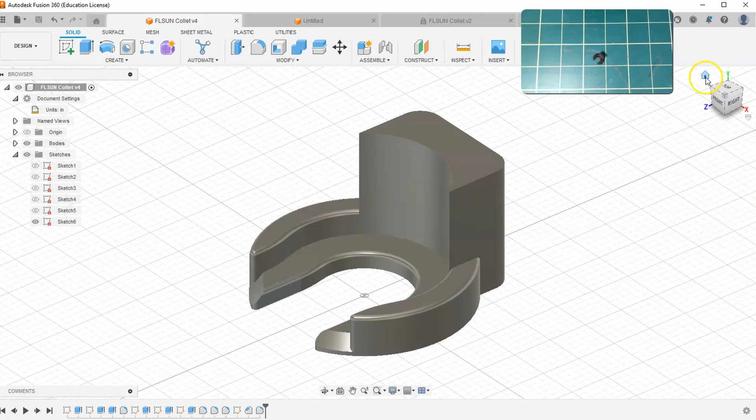In this video, I'm going to show you how to 3D model and prototype a 3D printable collet clip, just like this one right here.

I broke something on my FLSUN Super Racer, and when I was changing the parts, I lost one of the two small clips that go on either end of the Bowden tube. When I couldn't find any spares laying around, I decided to just 3D print one. But instead of finding one online, I thought it would be fun to make it myself and prototype it, showing you my process as I go.

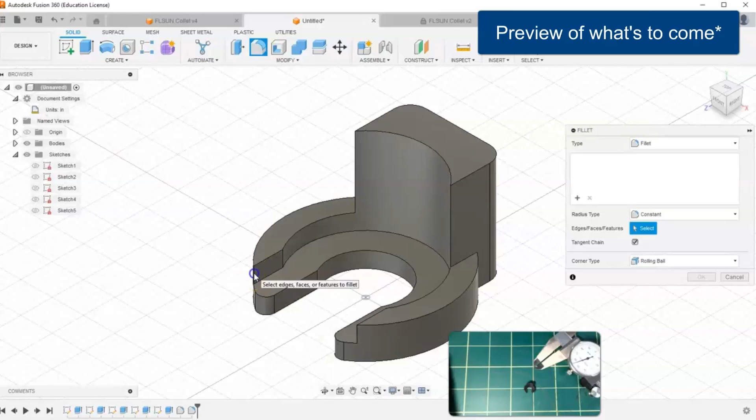I will be using Autodesk Fusion to 3D model and Ultimaker Cura to slice my prints, but you can easily use similar software to do the same thing. If you've ever been curious about 3D modeling your own 3D prints, this series is meant to show you my whole design process from beginning to end.

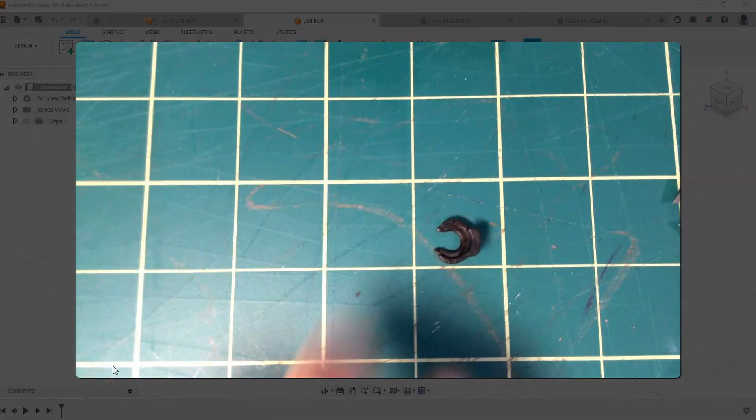So let's give this a try. The first thing we need to do is figure out the size of our collet. I'm going to wrap a dial caliper around the diameter, and it looks like it's almost half an inch exactly. So we can go ahead and start with that.

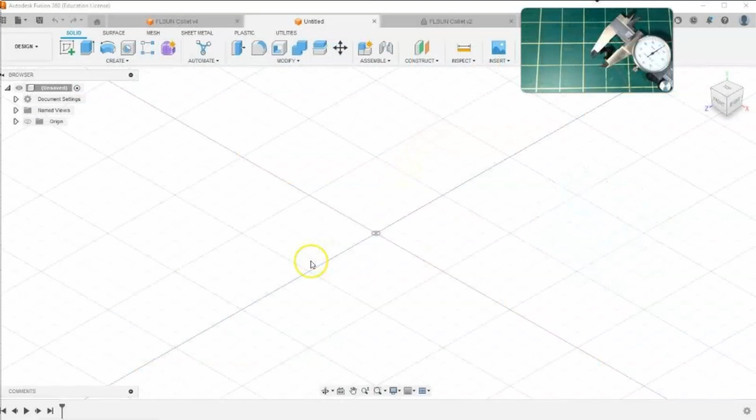I'm going to start a sketch on this bottom plane, grab my circle tool, and sketch it out. It looks like we're in millimeters, so let me change that in my document settings to inches. Hit OK and try this again, and we'll type in 0.5.

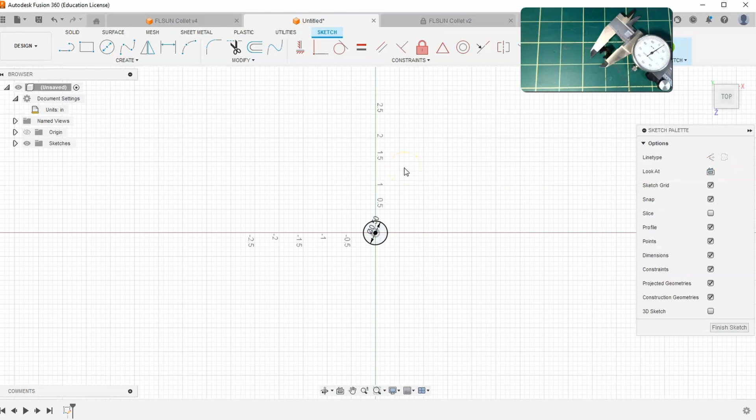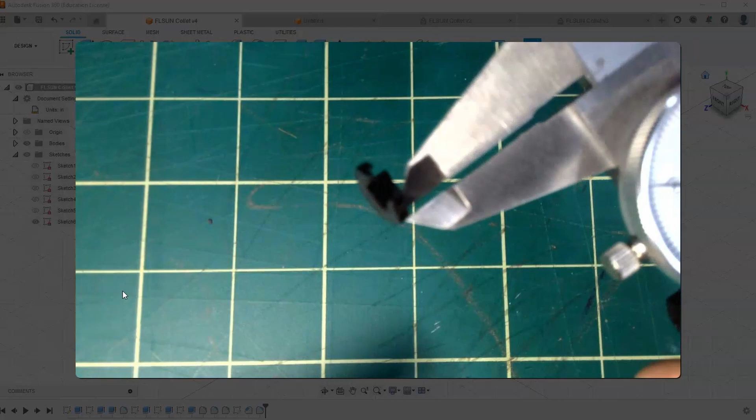How wide is this outer circle over here? If we wrap the caliper around the edge, you'll notice I'm not getting the entire thing - I just want that top piece. And it looks like it's about 0.06 inches.

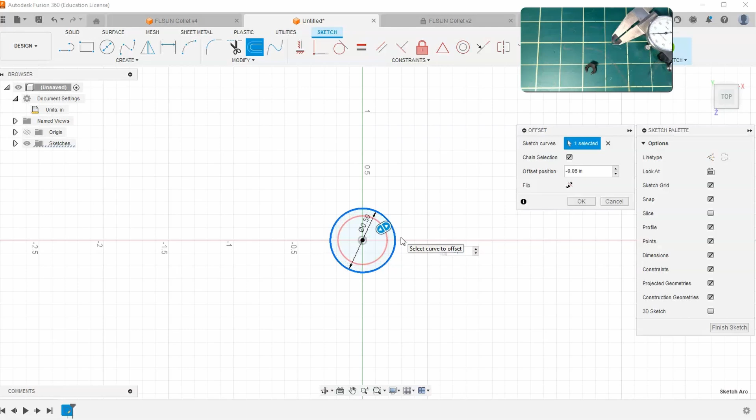Let's go back into Fusion and find my offset tool. Let's zoom in - we want to bring it inside 0.06, making sure we're going inside, so a negative 0.06. Hit enter. Then how tall is this thing? It looks like it's almost exactly 0.1 inches, so let's round up to 0.1.

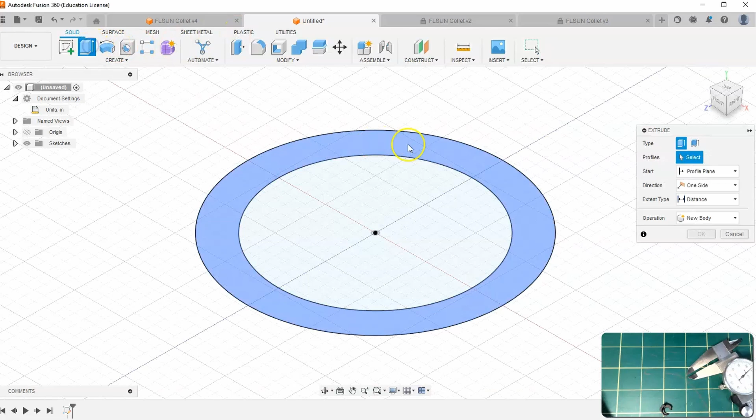So we'll finish our sketch, go to my home view, hit extrude, go up 0.1, and hit OK.

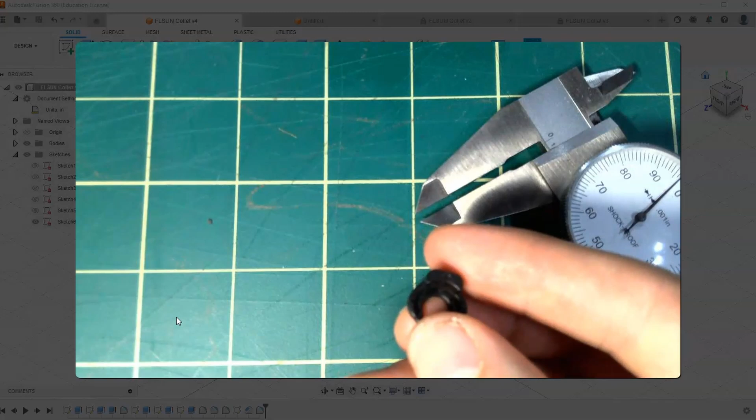So what else is going on with this thing? If you look here, you'll notice that this outer circle I just drew is actually the same as this circle of this bigger piece. This view is perfect to see it - you can see the circles are the exact same diameter, the exact same radius. So that's going to be pretty easy.

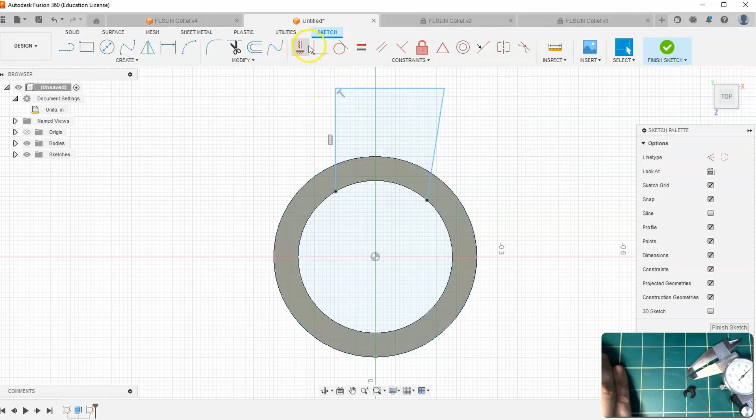Let's start a sketch on this top face. I want to grab my line tool and lock it onto this inner edge, draw it back, click out, then draw another one making sure I connect it to this edge. Right click, hit OK, and find my horizontal and vertical constraint - I'm going to tell this line to always be horizontal. Right click, cancel, and grab my construction line tool.

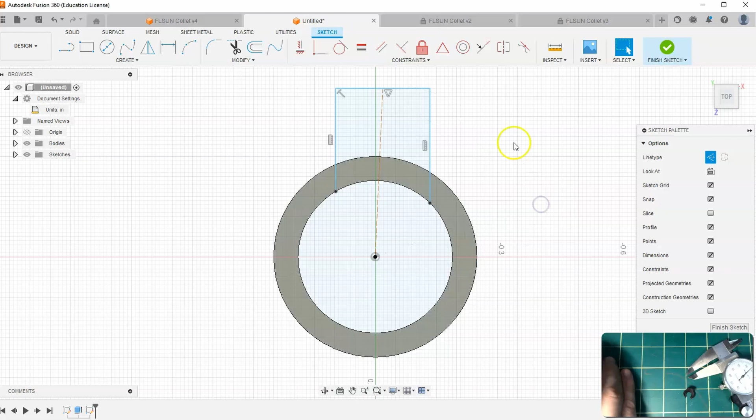I'm going to find the center of this. Once it magnetizes, I'll click and drag it down to my origin. Right click, hit OK, and tell this line to be vertical as well by going to my horizontal vertical constraint and clicking on this line. What does that do? It tells this to be centered, so no matter how wide I make this, it is always centered.

So the question is, how wide do I want to make it? We grab our dial caliper and wrap it around this edge. What do we get? About 0.3, a little bit wider than 0.3. We can round down that measurement to 0.3, so I'm going to give this a dimension of 0.3.

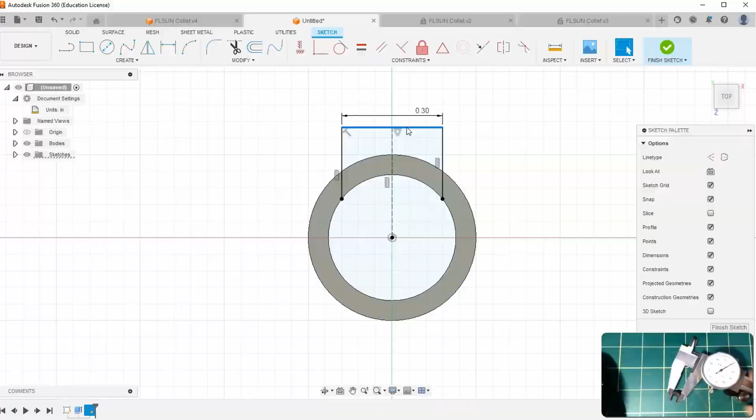The last thing we have to ask is how far back does this go? That's a little bit harder to figure out, but we can guesstimate it. I'm going to wrap it around this center edge. What do we get? Almost exactly 0.1. It's probably not exactly 0.1, but close enough that it's not going to matter.

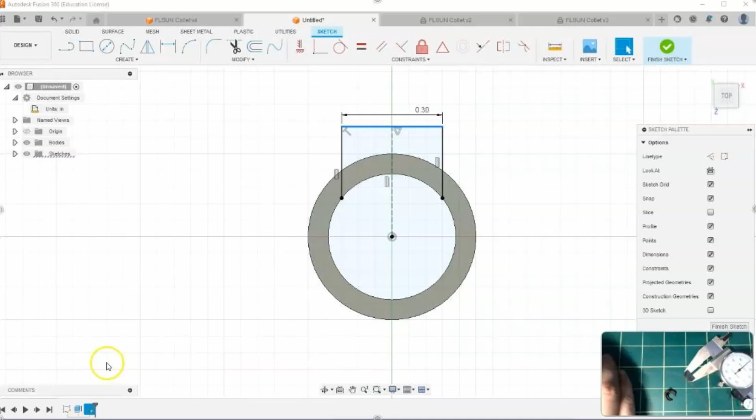Let's go back to a small screen and go to dimension. I want a dimension from this - actually, I'm going to right click and cancel. I'm going to grab my point tool.

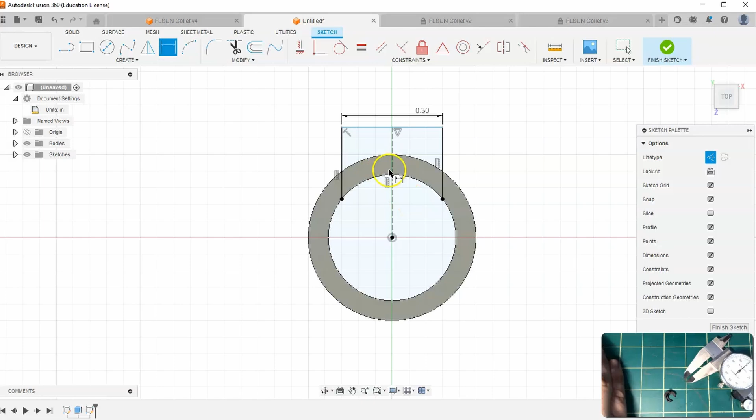I'm going to put a point down at the intersection of my construction line and this inner edge here, and measure from this dot. So dimension from this dot to this line—what is that dimension going to be? 0.1. Now, if we look at this, it's clearly filleted here on the back walls, but I'm actually going to add the fillets after I extrude it.

Let's look at this again. It clearly extrudes down and up. So how do we go down and up? We're going to finish our sketch, go to our home view. I want to extrude this down, and I want it to go all the way to the bottom, so I'm going to go to Object and click on the bottom so that it extrudes all the way down.

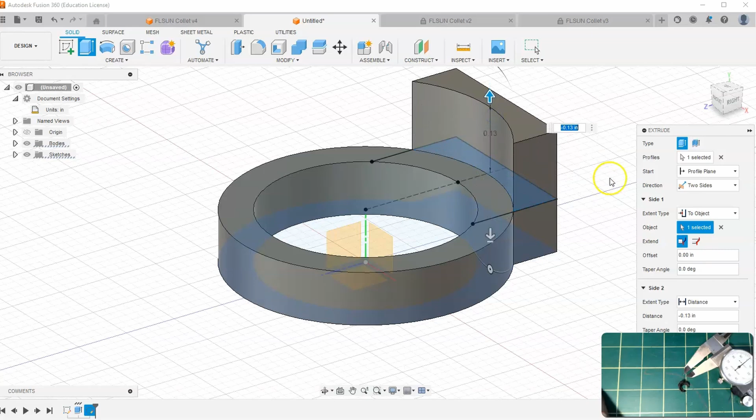I also want it to go up, so I'm going to change this from one side to two sides. Where's the other direction going to go? It's going to go this way, and I don't want to forget this profile, so I'm going to go ahead and select that as well. And I want to make sure that this is a join, so I'm going to move this out of the way and go to join.

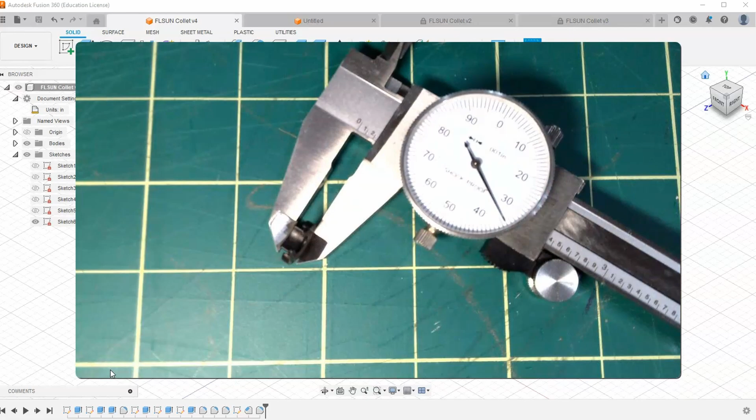Then the question is how high do I want to go here? How tall is this thing? It looks like it goes up a little bit more than 0.225—looks like it's 0.235. I'm going to round that down to 0.225. So let's go back here—we want this to go up. We'll say this is the negative direction in this case, so negative 0.225.

And so now it's starting to look a little bit like this shape here. Let's remove our dial caliper and take a look at it. So what do we need now? We need that inside smaller circle. So let's go ahead and figure out the diameter of this.

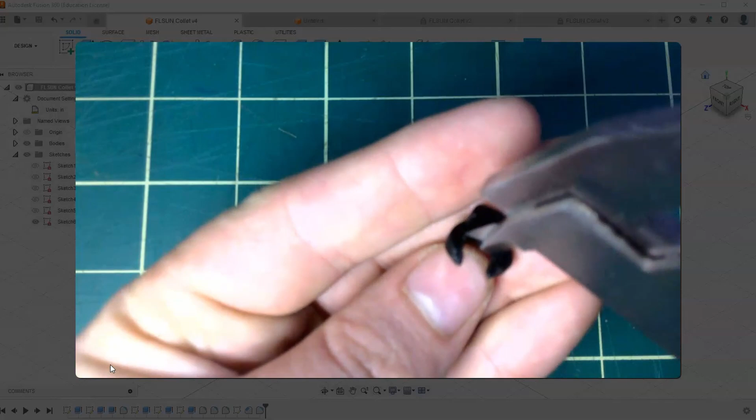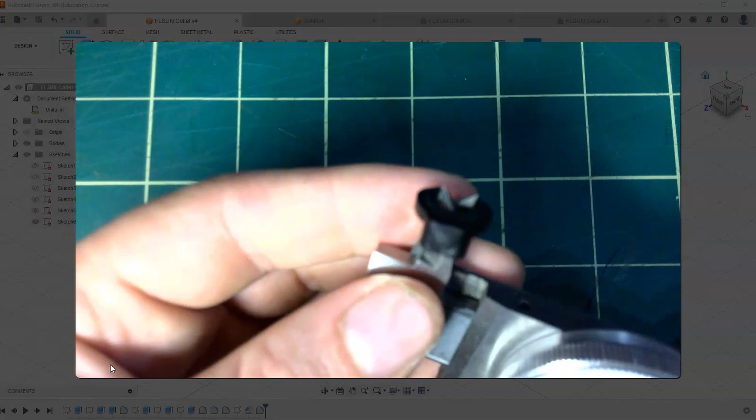So we stick the top of our dial caliper inside, and we pull it apart until we get the diameter. You can see how far apart, if we look at it from the top view, the ends of this inner circle are by using the same measuring of this dial caliper. And what is it? It looks like it is 0.225. And so we go back to our small view again.

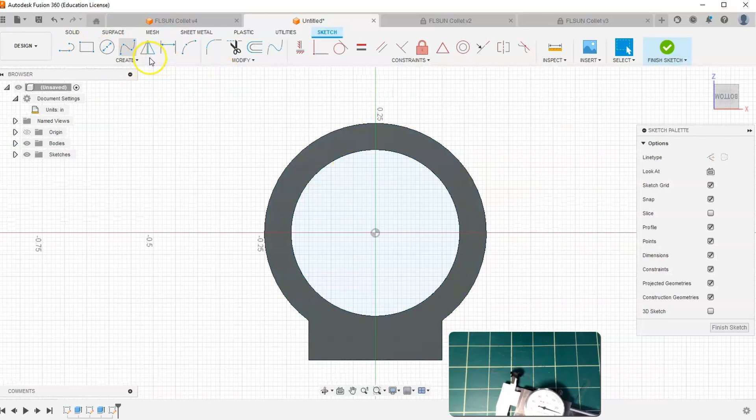I am going to start a sketch—this time I'm going to go from the bottom, because this is extruding from the bottom if you look at it. So I'm going to draw a circle and tell it to be 0.225. I'm going to finish my sketch, and extrude this shape upwards.

The question becomes, how far up do I want to go? So we grab our dial caliper and take a look—how tall is this inner circle here? It looks like it is about 0.05. And so this is in the negative direction in this case, so negative 0.05.

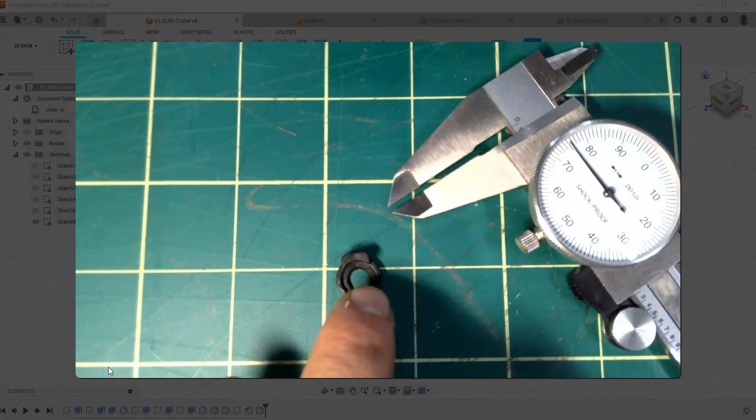While we're looking at this, you'll notice that the inner circle on the bottom comes a little bit closer together than the top outer circle, but both get cut off before they complete as a circle. You'll notice this one finishes as a circle, but this one sort of finishes as a circle, then almost a straight line there. So let's go ahead and mess with this smaller inner circle first.

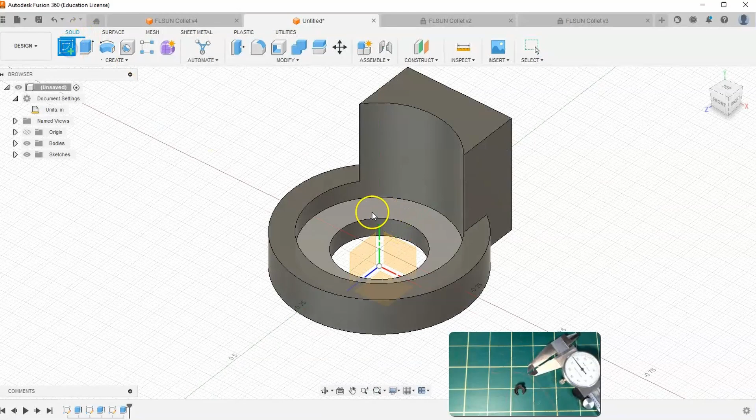So how am I going to do that? I'm going to start a new sketch on this face, and once again grab my line tool, and connect it to this inner edge here and drag it down. I'm going to move my screen over a little bit. Click, click, click. And just like before, I want to make sure all my lines are horizontal or vertical—so now we can see that this is perpendicular.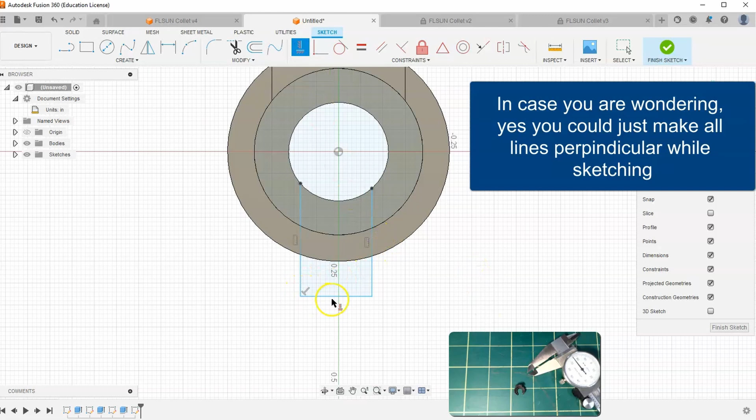I can check—it says sketch geometry is over constrained. All that means is that it already has that constraint. Cancel. I want to turn on construction, click on my line tool, and just like before, select my origin and the center of this line down here, and click. When it magnetizes, right click OK.

I just want to make sure that this line is vertical. Once I have it vertical, you can see that it's always going to be centered because this line is vertical and stuck to the center. Then the question is, how far apart are these edges here from here to here?

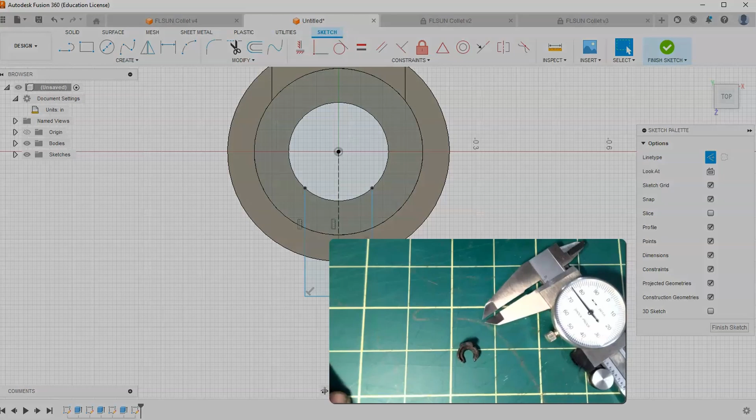To figure that out, we're going to go to the top jaws of our dial caliper again. Let's see here—if you look, I'm on the inside here of this, and it looks like it goes about 0.2. So we're going to round up to 0.2. And so we'll go to dimension from here to here is 0.2.

And then how far out should we go? Well, it really doesn't matter at this point as long as we're not inside. It can be way down here. We're going to be cutting out all of this space.

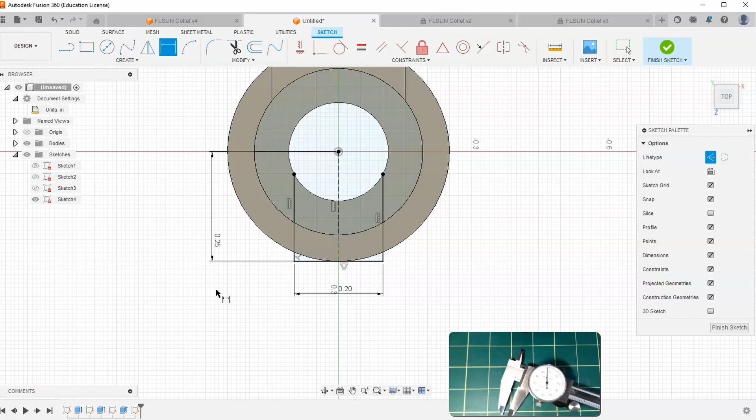I'm going to give this some dimension because I'm sort of OCD and I want this sketch to be fully constrained, as it is proper practice. It could be 0.3, it could be 0.4 - both do the same thing. It could be 0.25, I think, but that looks like it's just over the line. So I'm going to go to 0.3 just to be safe.

I'm going to finish my sketch and extrude this shape here. I want to make sure I select the entire profile, and go symmetric so that I'm cutting out the entire thing.

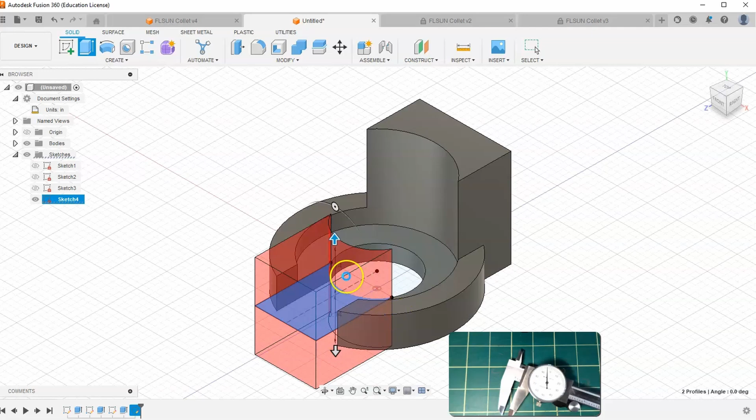Now it's really starting to look like this part if I go into full screen here. And this top circle cuts off a little bit sooner than that, you can see. But it's really starting to look like it.

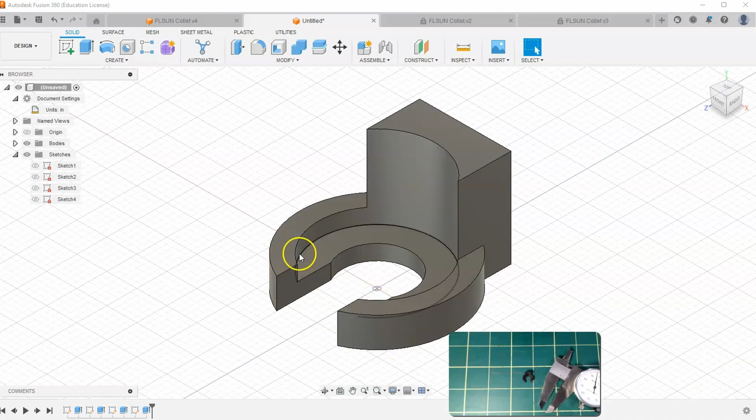Okay, let's continue on and cut out the part of this top face that's supposed to be missing. To do that, I'm going to start a new sketch on this face. Just like before, we're going to grab a line tool that connects to this edge right here, draws down,

comes out, and then connects to this edge as well. And you'll notice that it's not actually magnetizing. It wanted to magnetize there, but that looks like a tangent. I don't like tangents in this specific thing, I definitely don't want it to be. So why isn't it connecting? I'm going to right click and hit cancel.

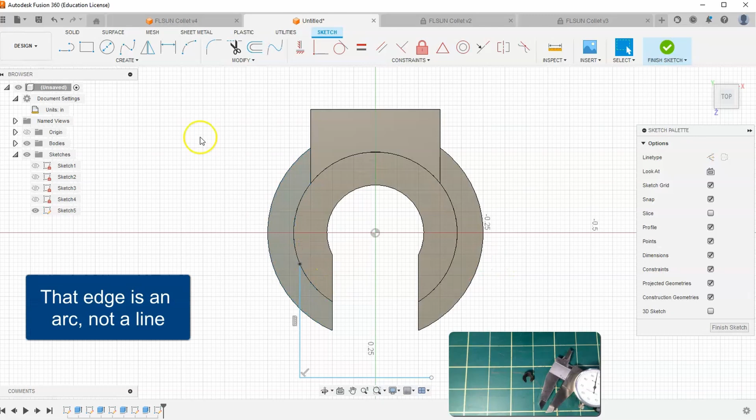Why did it connect to this edge, but not this edge? The answer is because I'm drawing on this face over here, which is not contiguous to this face over here. So it doesn't actually see this line in my sketching plane. Sometimes that happens, and when you can't lock on to the edges, all you need to do is go to Create, Project, Project Geometry, or hit P on your keyboard.

And it opens up this Project feature. I'm going to go ahead and select that edge right there and hit OK. Now if I grab my line tool and try to connect, you can see that that geometry very clearly exists. Right click, OK. Make sure my lines are horizontal and vertical for myself.

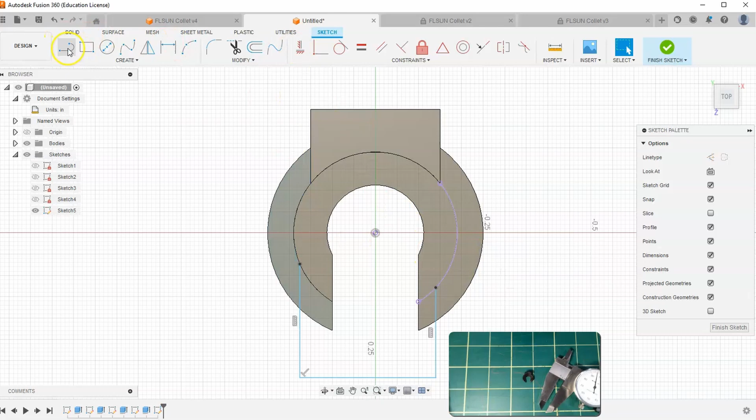Just like before, I'm going to grab my line tool and my construction line. I want to make sure that it's centered, so we find that center and tell this to be vertical. So now, just like before, it's always going to be centered.

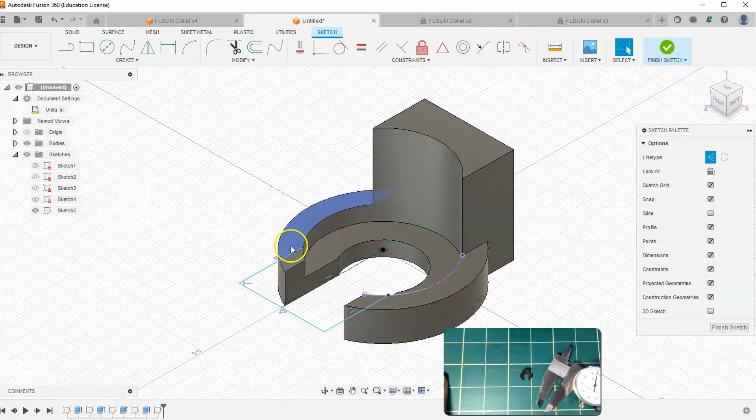The question is, how far apart - if I go to my home view, we can see this better - is this top edge to this top edge? What do we get here? Yes, I get 0.325, it looks like. Okay, let's go back to Fusion.

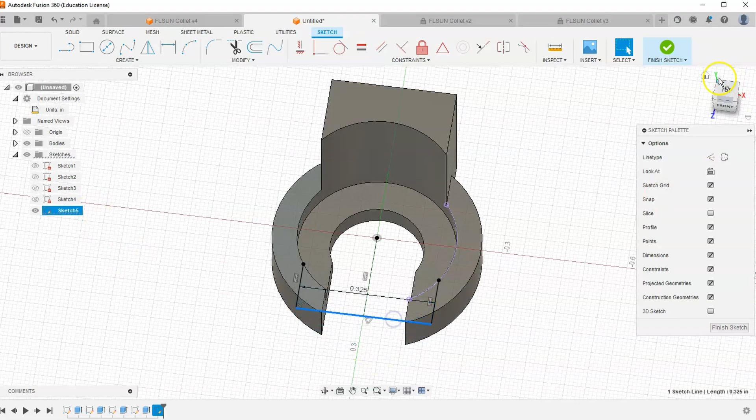Let's give this a dimension of 0.325. Once again, it doesn't really matter how far away this line is, as long as it's not inside the edge here. I'm going to just give it some random dimension, it doesn't really matter.

I'm going to right click and hit cancel and finish my sketch, and extrude this and this. You'll notice that I can't actually select that. That's weird, let's see why I can't select that.

If we go back into the sketch, it looks like I actually didn't quite finish this shape here. So let's go ahead and grab my line tool. I'm going to connect to here, and now we have this whole shape by drawing this line.

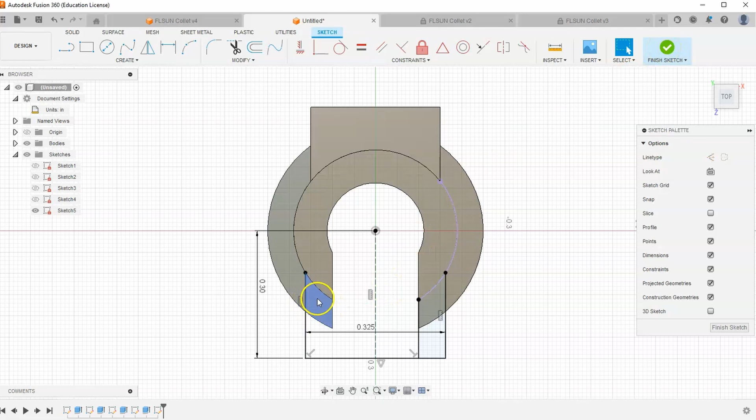It looks like when I projected this, I didn't also project these other edges, so it wasn't seeing these as lines within my sketch. But again, I was drawing on this face, so it saw it over here, but not over here. No big deal, you just have to edit your geometry a little bit.

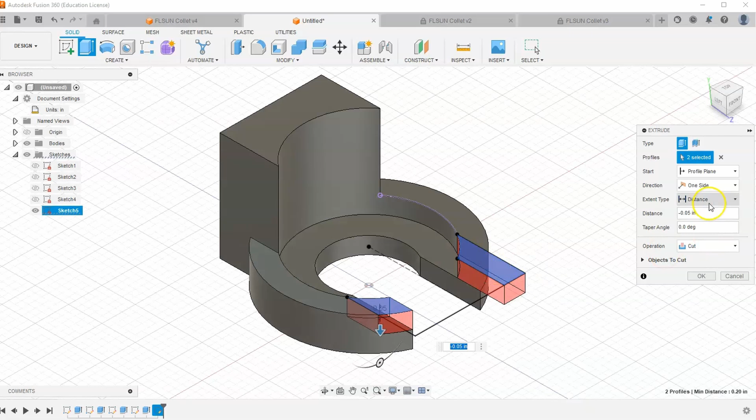We hit extrude again, and it looks like I'm selecting a little bit more, but that doesn't matter all that much because it's still effectively only cutting out the part we need it to. So how far is this going to go down? Well, it's going to go down to this edge right here. So we'll go to Object and make sure we select this and cut it down.

Now you can see it's really starting to look like this shape here. But there are some extra little tidbits about this that we need to take into consideration. It looks like it's rounded off in all of the places - for example, in the back it's very rounded off, so we can add a fillet here.

I think 0.05 is probably a good amount compared to what we're looking at here. If we look, you'll see that it's very rounded off in these spots. So how much is it rounded off in these places? Well, we'll grab our fillet tool and click on these edges, and bring them in just a little bit.

Let's go to our top view. I think 0.025 actually looks pretty good here. If we go back and look at this, maybe this is 0.025, but this is a little bit smaller, so maybe we hit cancel and try it again. Maybe this is 0.025 here and here.

And then we add a new fillet here and here, and maybe this one is only 0.01.

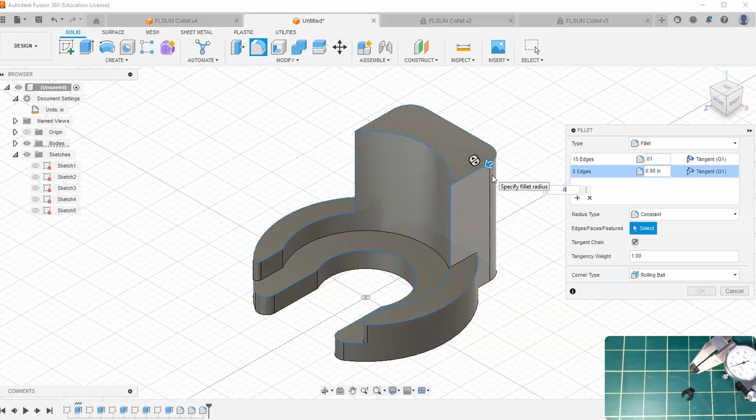We'll go back full screen and take another look. It is sort of rounded off on all the other inside edges as well, not very sharp. So we come back and add our fillets here and here and these other edges too. Let's give this a small fillet of 0.01. I forgot to grab these ones, so I'll go ahead and grab these as well. 0.01, hit OK, and that just gives it this sort of softness.

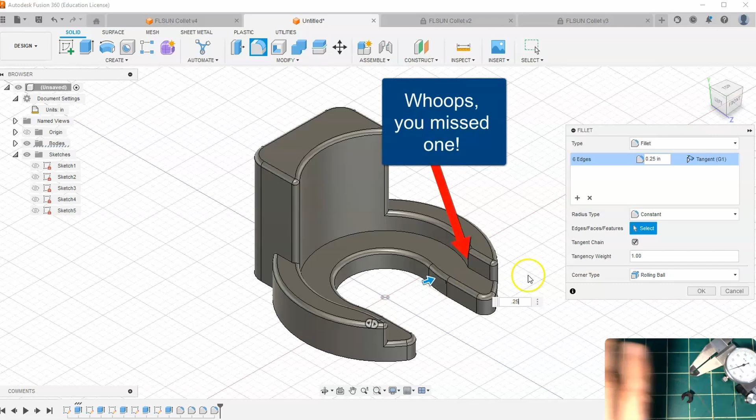With this, I actually wanted to do these edges as well. If we look at it again, you can see it sort of rounds in here. If we go 0.025, what happens? Or I will actually want 10 times more. That way it just sort of enters in with that rounding effect. Hit OK - I think this is pretty good.

What do we need to do now? Well, we need to export it. So I'm going to go to File, Export. I should probably save it first - let's make sure, let's go ahead and save it, and we'll just call it our FLSUN.

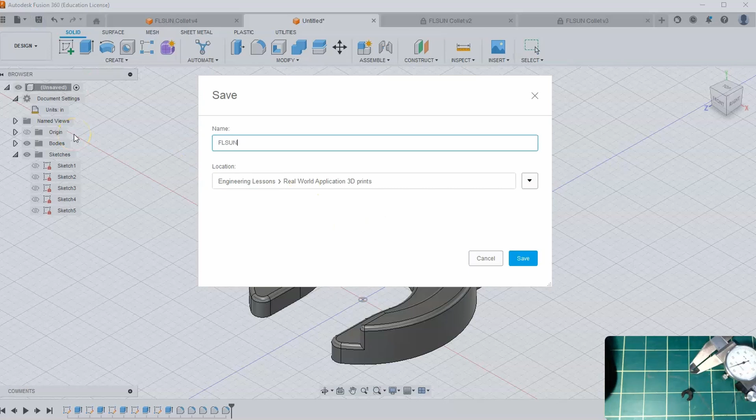Then I'm going to go to File, Export, make sure I have the STL file selected - I'm supposed to have some sort of save file. I'll just put it in my downloads and hit export.

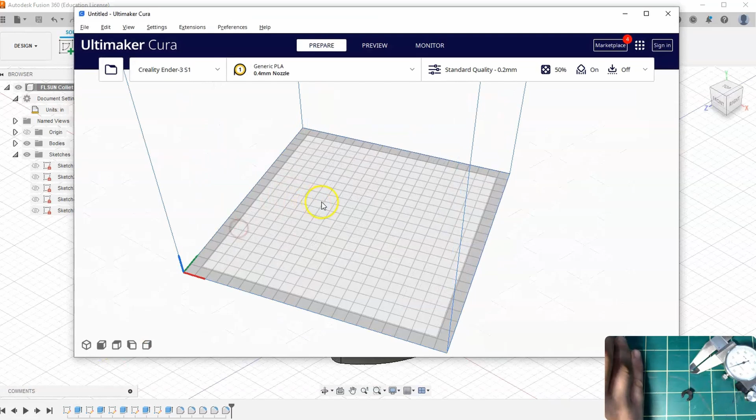So let's go ahead and go to Cura. On my Ender 3 S1, let's drop this file in and select the STL file we just exported. You can see that it imported in sideways - sometimes that happens. I'm going to rotate this so that it's flat by clicking on this and clicking on the bottom here.

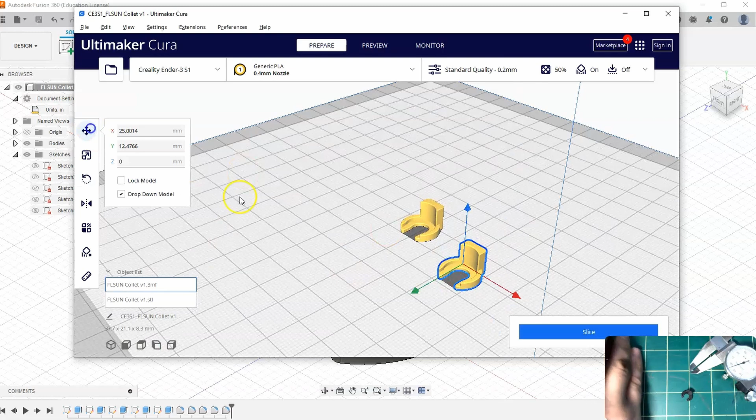Let's actually go ahead and do 2. And then what am I going to do? Well, I'm just going to slice. It looks like it'll print super fast in 10 minutes, and I'll let you know how it goes.

So here we have the first 3D printed part. You can see that they're actually pretty close to identical in size. Somehow it ended up being a little bit taller - I'm not exactly sure how that happened, but I'm sure I'll figure it out. We can adjust that because it doesn't really matter.

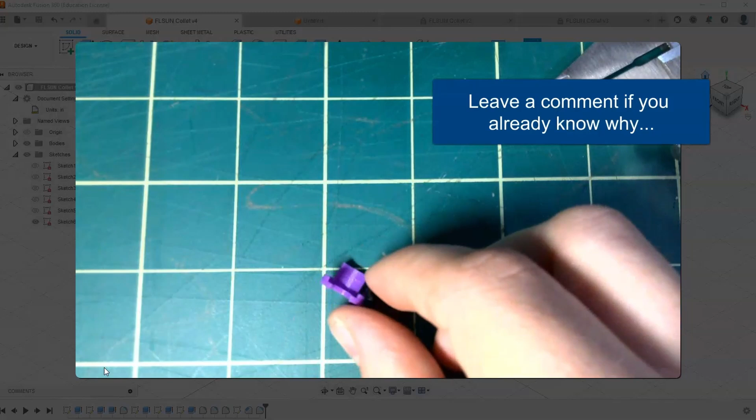As you can see, when I tried to put it on, it went onto one just fine - it went onto the top Bowden tube, but the pneumatic connector at the actual hot end is a little bit different, I guess a different manufacturer made it, so it doesn't quite fit on there. I could move on from here because I have this original that does work, and I could just use this on the bottom, but I want the one I make to work pretty much universally. So let's keep working at this.

So as you saw, that one actually broke when I tried putting it on the bottom - it snapped around. So why did that happen? Well, if I look at this more closely, what I notice is it's kind of inclined. It's kind of hard to see, I'm not getting it to focus very well, but if you look, you can see it slightly inclines in. Let's see if we can figure that out.

So we go back into Fusion here. I want to go back - actually, let's just go ahead and delete these extra fillets that are in my way. I can always add them back later. Delete that fillet, and I guess the fillet after, and I'm going to delete that fillet as well.

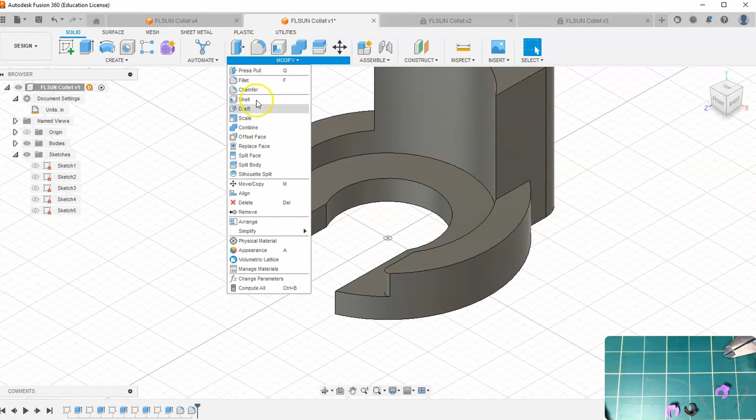What I want to do is add that little incline, so let's go ahead and add a chamfer. There it is - click on these two edges, and let's sort of let it incline up a little bit, hit OK. Then we can add those extra fillets back.

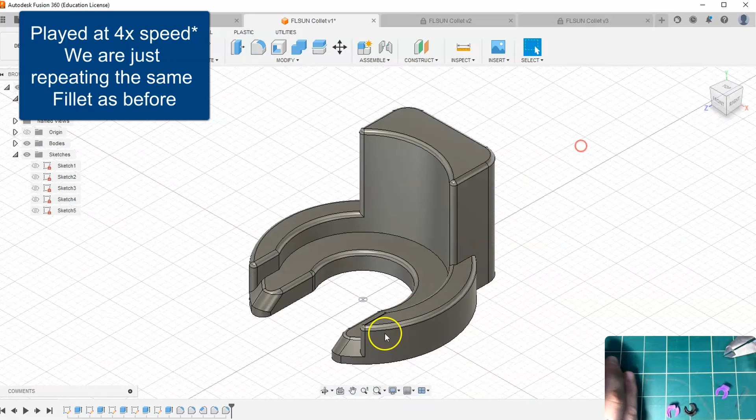And I think this one will hopefully do better. Let's go ahead and save it. And file, export as an STL.

Let's give this a try and hit slice. Looks like this one will only take 5 minutes. That makes sense because I don't have 2 of them this time. And I will let you know how it goes.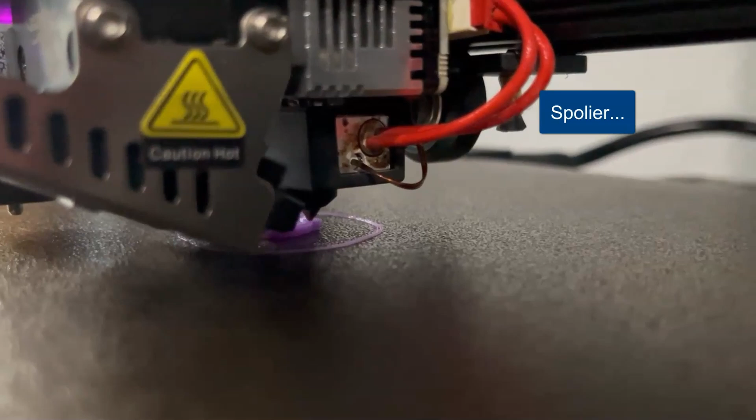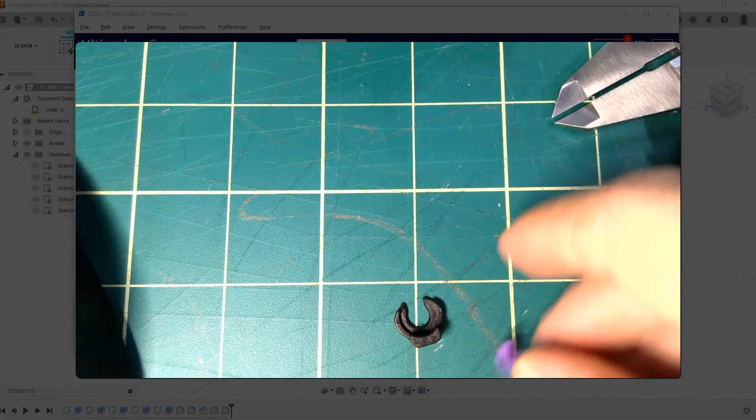Okay, so we have the new one here. Let's move these out of the way. As you can see, it is slightly inclined, but it doesn't quite look as good as the one in Fusion here. So if we look, the inclines aren't quite so prevalent.

That was one of the problems, as you can see in the video when I'm trying to insert it on, is that it goes on the first connector just like the first prototype did, but it has a hard time sliding on in the first place. I think that's because the chamfers are not very pronounced. The second problem is that I did find I could force this one onto the bottom connector without breaking it, but it was a very tight fit.

So let's go ahead and work on both problems, and let's fix the tight fit first. I think it's tight because the inner part is too tall.

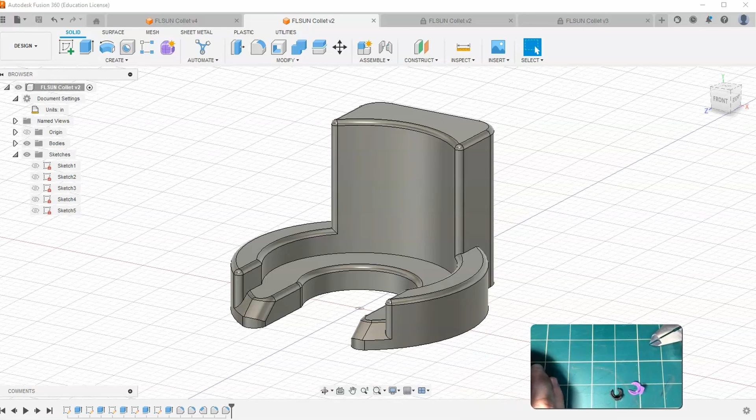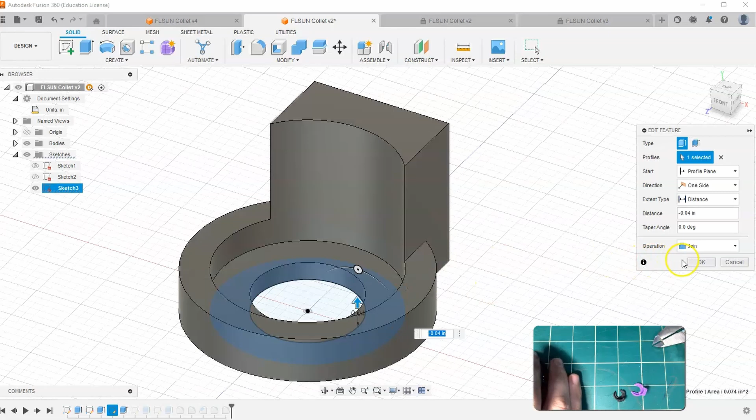So let's go back to Fusion. Move this off to the side just a little bit. And instead of trying to fix these fillets and chamfers, let's go back in time to when we extruded this face up. I know our measurement was 0.05. Let's actually go down a little bit, and let's move this over to 0.04. So now it's not quite so tall, so hopefully it'll fit better.

It looks like that messed up that last fillet, so I'm going to go ahead and delete that fillet, and we can put that fillet down again.

So let's go ahead and hit save. And then after it's saved, we can go to File, Export, and hit Export.

But there's one other thing I want to do, because even though I'm making this whole thing a little bit shorter so that hopefully it'll fit, again you'll notice the incline doesn't show up very much. I suspect that has something to do with the layer height of the way I'm printing it.

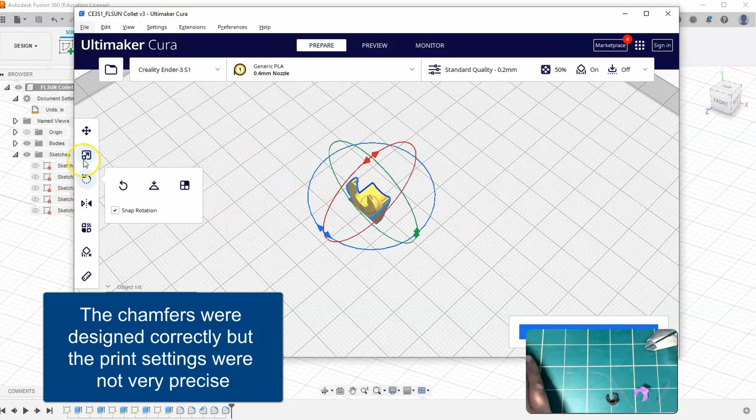So if we bring this away and we look in Cura and upload the newest version, and just like before we're going to rotate this flat, and then instead of just slicing it, I'm actually going to change it from standard quality to a super quality so that it has a smaller layer height. I'm going to go ahead and keep my changes.

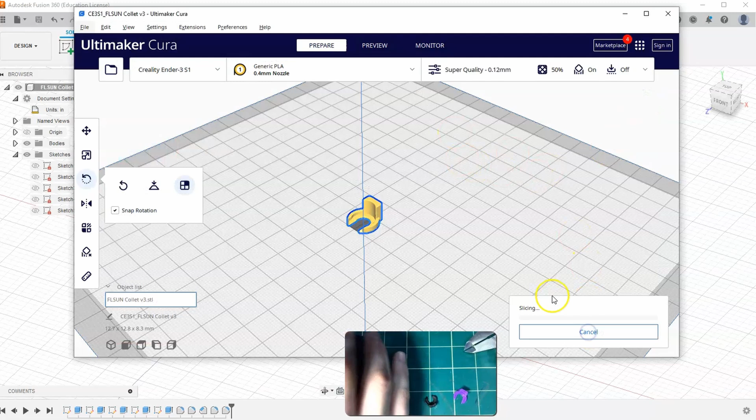It actually prints it, you can see now it takes 9 minutes, and if we look in our preview, it actually gives you just extra layers, so it prints in a smaller amount. It prints a little bit slower, and each layer builds up a little bit slower, so it'll be a lot more precise as it's creating that incline there.

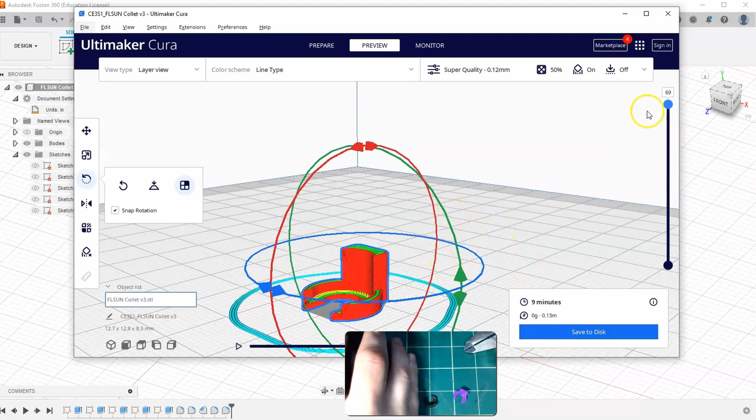And so I will let you know how this one goes a little later. So this third prototype, you can see, is a lot more detailed.

First off, it's a little bit shorter on the inside here. That was probably a big deal. When you look at me connecting it, you can see that it clearly works perfectly. So I have a working one.

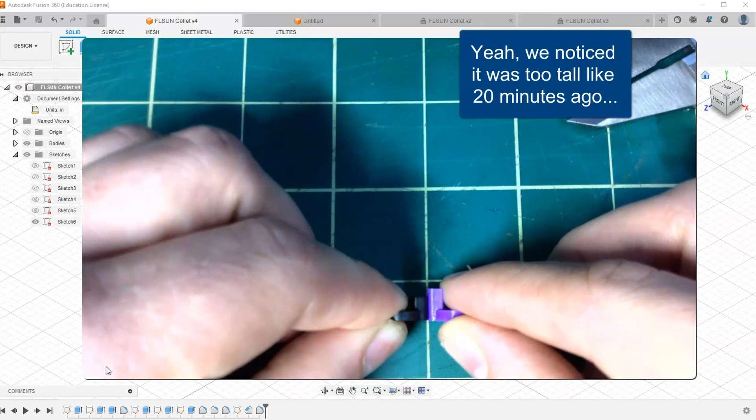And while I was putting it on, you'll notice how tall this is, especially when I lay it right next to the other one—you can see how tall it is. And I actually realized what the problem was. If you look, if I stack it on top of the other, they're almost the exact same height.

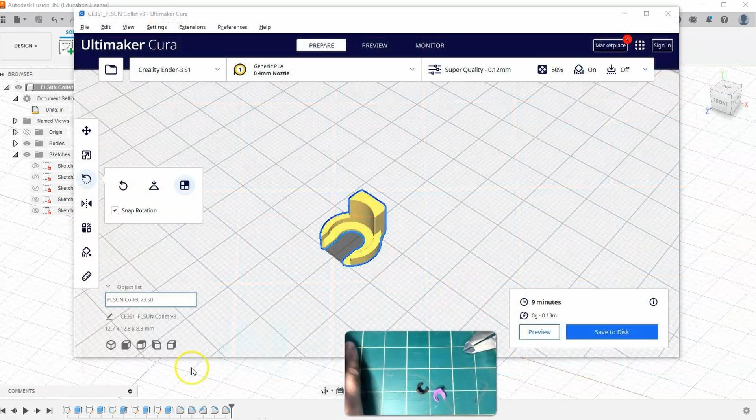So when I extruded this up, I went up 0.25, I guess, from this edge, but this is 0.225 in height total. So what I should have actually done, and we can actually fix this right now in Fusion, is go back to that extrusion, this one right here.

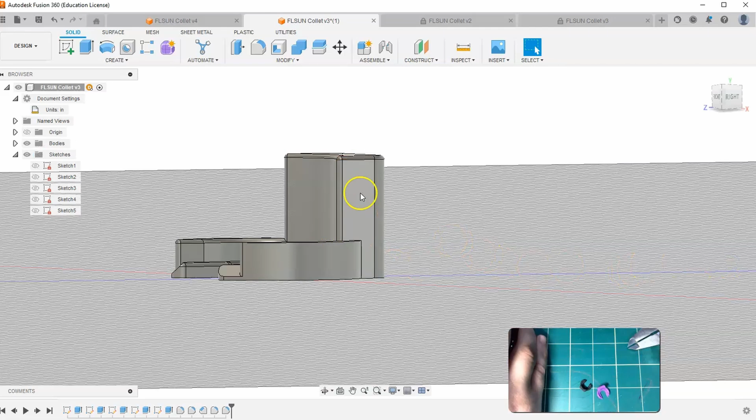If we look, how tall is this edge? Well, actually, we can go find that out—I don't remember my dimensions. How tall did we say this was? This was 0.1. So if this is 0.1 and the whole thing is 0.225, then we really only need to go up 0.125.

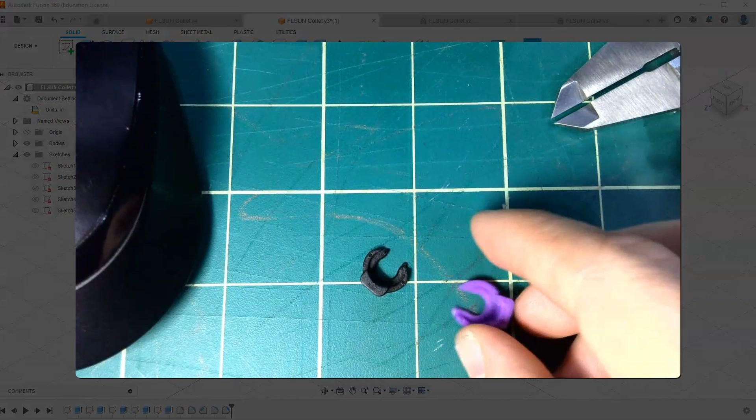And hit Finish Sketch. With that in mind, the one I have functionally works, so I don't need to print the new one, but I will be exporting the most up-to-date version and posting it on Thingiverse. But with that, we're done.

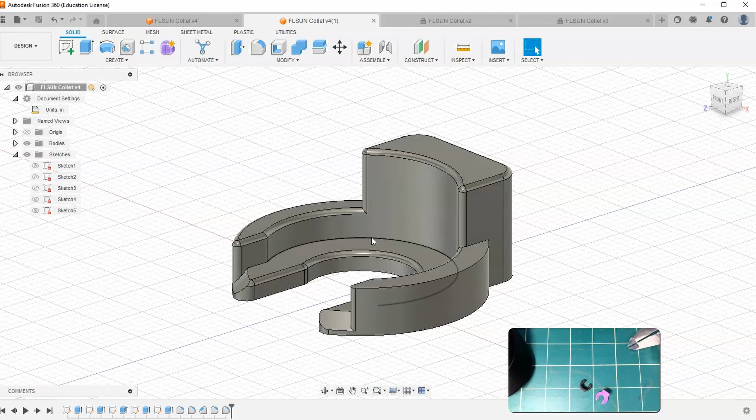So let me go ahead and save this newest version. And yes, I could have just found one of these clips online and 3D printed that, but there are plenty of things out there that there aren't files for, or maybe there are files but they aren't exactly the way you need them. My goal for this series is to show you how I would go about designing and editing those things.